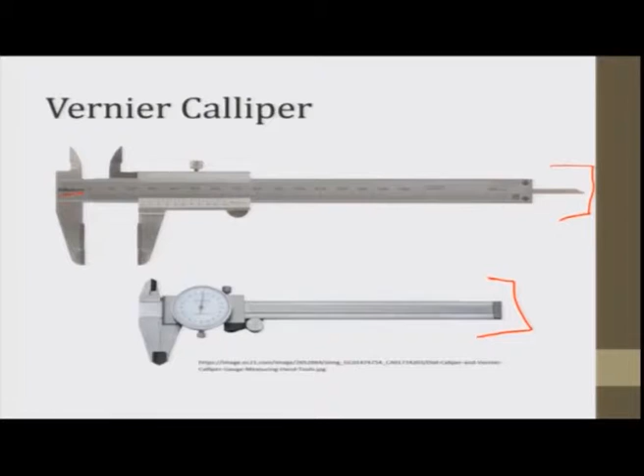The first instrument I will select here is the vernier caliper. These are the two vernier calipers that we will discuss, both manufactured by Mitutoyo, Japan, and they have certain specifications. You can see the instrument here, it has various components.

This instrument has a main scale, and its length is about 12 inches. You can see it is calibrated up to 200 mm on the main scale. On the lower side it is actually 200 mm, however the length of the scale is even larger, to accommodate the other scale, the movable part of the caliper, which we will discuss.

On the upper side of the main scale we have the inch scale, which is calibrated up to 8 inches. However, there are certain other calibration lines visible. The material of this specific vernier caliper is stainless steel, stainless hardened steel.

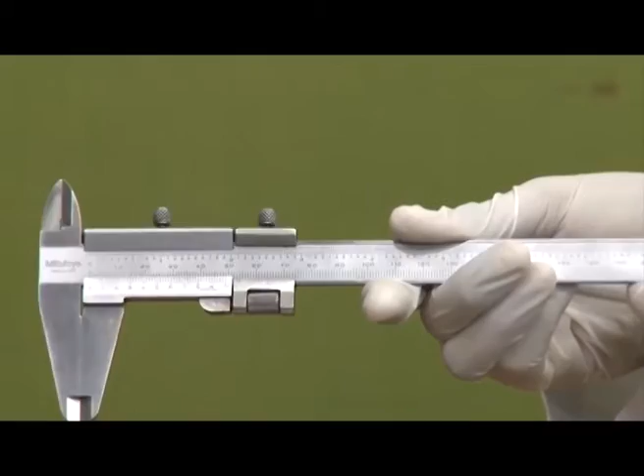It has various components as we have discussed in the theory as well. The first component is the solid L shaped frame, which is actually fixed. It has two calipers on both sides, and there is another caliper that is movable.

You can see this solid frame here, in which we have two jaws on both sides. The jaws on the lower side are for the external diameter; we can measure the external diameter of cylinders, spheres, or any body using the lower jaws. The upper jaws can be inserted into the cylinder to measure the internal diameter.

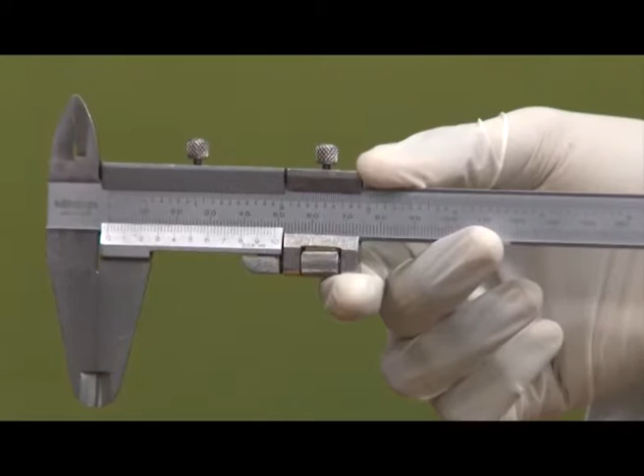If we close it completely, you can see the external jaws are also closed, and the internal jaws are also closed. When we open it a little, you can see these internal jaws, which are on the upper side, can be inserted inside, and the external jaws can hold the workpiece from the outside.

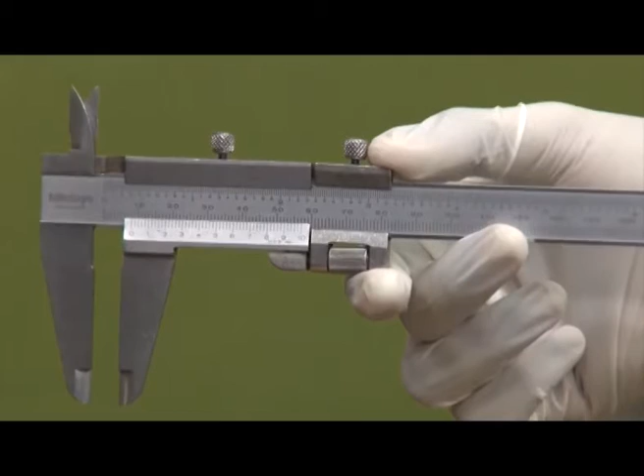We can see that whatever the slot length or gap between the lower jaws, the space is equivalent to the distance between the upper jaws. So the main scale is graduated in millimeters on the lower side and inches on the upper side.

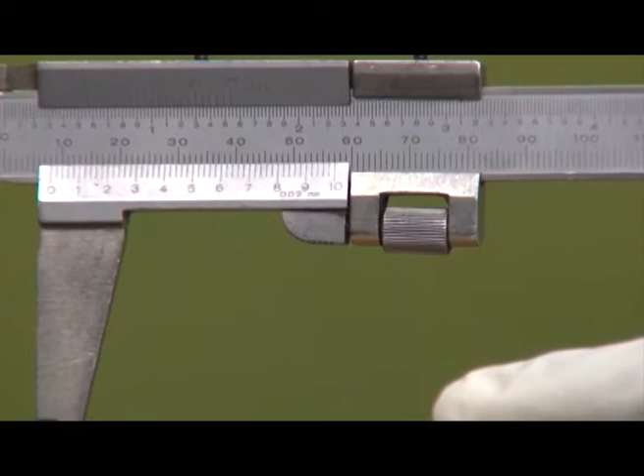There is another scale, the critical component of this vernier caliper, known as the vernier scale. You can see markings from 0 to 10 written on it. Within one number, from 0 to 1, we have 5 divisions, from 1 to 2 we have 5 divisions, and so on. This makes from 0 to 10, 10 into 5 equals 50 divisions.

Also you can see the least count is written here, 0.02 mm. It has screws attached to it. On the lower side we have the fine adjustment screw, and on the upper side we have the clamping screws.

How do we operate this one? First we tighten the screw which is on the right hand side, and then using the fine adjustment screw we can adjust the distance of the vernier scale.

The vernier caliper, as I have said, is made up of either stainless steel or tool steel, depending upon the nature and severity of the applications. It has engraved graduations which can be either forward vernier or backward vernier. This specific vernier caliper that we have in hand is the forward vernier.

You can see the reading starts from 0 to 10. Had it been from 10 to 0 on the vernier scale, it might be called a backward vernier.

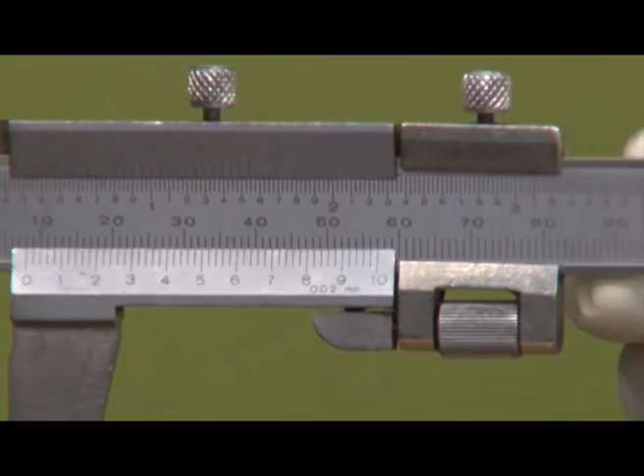The clamping screw enables the caliper's movable jaw to be locked in a particular position after the jaws have been set accurately over the job being measured. This arrests the further motion of the movable jaw, allowing the operator to note down the reading in a convenient position since the jaws would not move further.

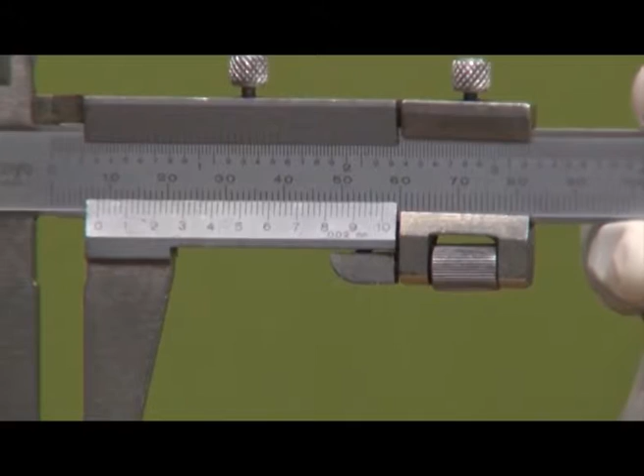Now the fine adjustment screw enables the operator to accurately enclose the portion of the job where measurement is required, by applying optimum clamping pressure.

However, there are certain guidelines before using the vernier caliper. I would like to tell them: we need to clean the equipment, clean the vernier caliper or any equipment. This is the basic precaution or guideline that we use with the instruments.

This vernier caliper is actually the analog or mechanical vernier caliper. We also have digital vernier calipers where we can adjust the zero. At any position we can say this is the zero position, since it's a digital scale. But in this vernier caliper, we need to calculate the zero error if it is there.

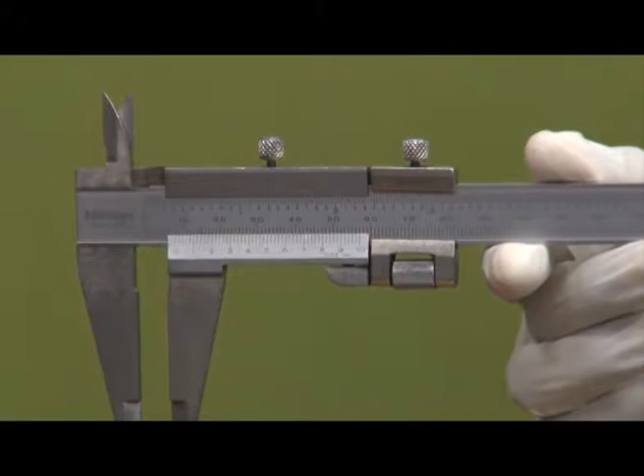Deterioration happens due to small dust particles or tiny chips which can clog or come in between the rack and pinion arrangement of the vernier caliper, which can hinder it. So, it is important to clean it properly.

The first part is I have to clean the jaws, because it is calibrated based upon this surface. This is a flat surface, and the flatness has to be approximately at zero level, though no actual zero level exists. So it has to be cleaned from here as well.

However, we can use cotton to clean it using acetone. So let us first clean the instrument and the workpiece.

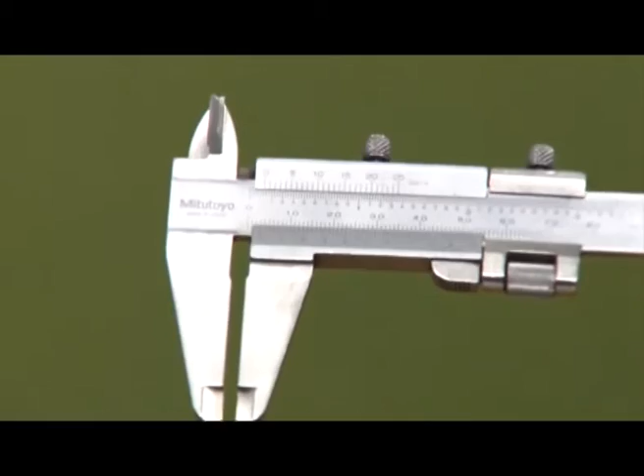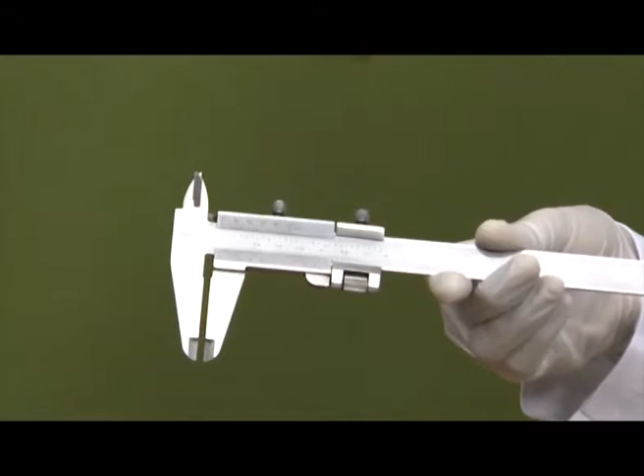Now I have this cylinder for which I like to see the internal diameter, the external diameter, and also the height, or what we can call the width. I like to see these dimensions. But before that, while we are cleaning it, I like to just tell the guidelines.

When the caliper's jaws are fully closed, it should indicate zero. If it does not, it must be recalibrated or repaired. Now, loosening the clamping screw and sliding the movable jaw, the opening between the jaws should be altered to be slightly more than the feature to be measured.

So, let us clean first.

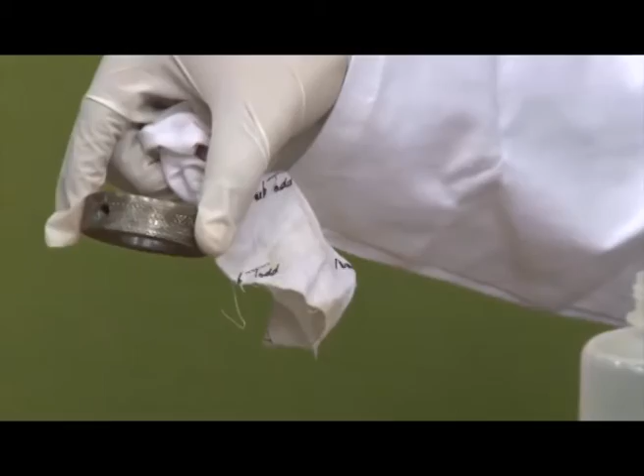So, the workpiece is to be cleaned now. We have applied a little acetone here.

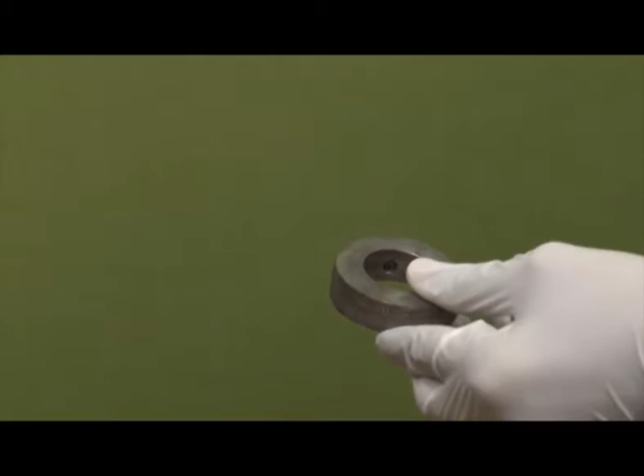So, I like to first see the external diameter. Also, not to forget, if we see the back side of the vernier caliper, you can see there is a straight probe.

This can also be known as a depth gauge. If we open it, we can also see the depth. We can see this is a probe, this is a scale. If we open it, whatever length it gets opened to, that length can also be read on the vernier scale.

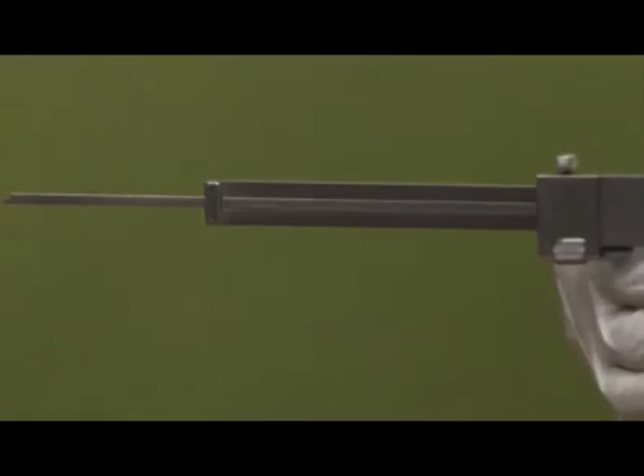So, I will first explain the vernier principle, the principle of the vernier caliper. Actually, the vernier caliper was invented in 1631 by Pierre Vernier, who was a scientist, and this is the instrument which is, I can say, most widely used in industry. There are certain measurements that we can just do using the scale.

The main, general steel rule has a least count generally of 1 mm, or sometimes 0.5 mm, where 1 mm is divided into 2 parts. But the vernier caliper can measure up to a least count of 0.02 mm.

Least count is nothing but the minimum reading that can be taken using a specific instrument. So, before checking the reading, I like to discuss the principle of the vernier caliper.

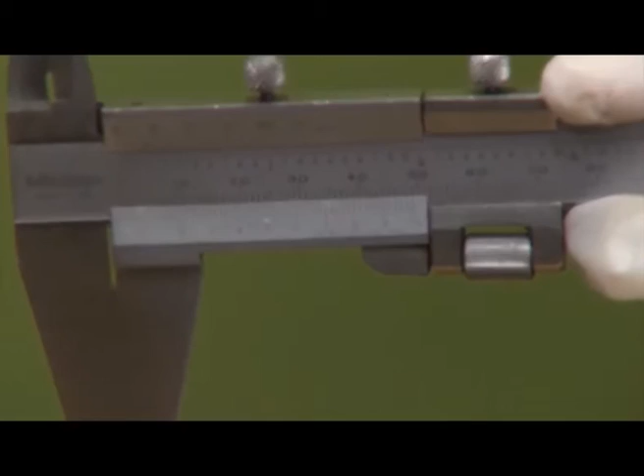So you can see that there are 50 divisions on the vernier scale. See, the numbers are from 0 to 10; between 0 to 1 there are 5 divisions, between 1 to 2 there are 5 divisions, between 2 to 3 there are 5 divisions. If I continue this, it is 5 divisions times 10, which becomes 50.

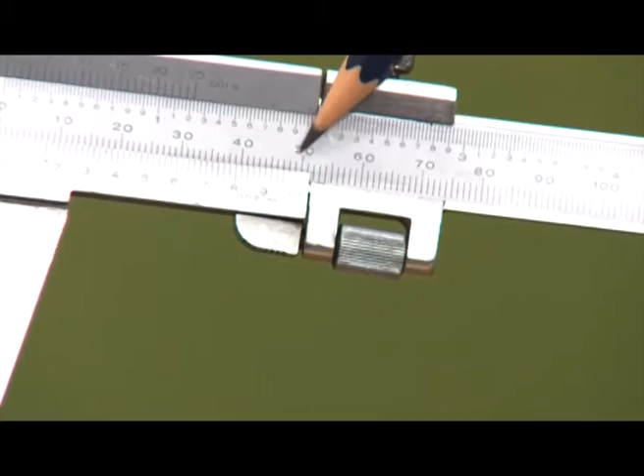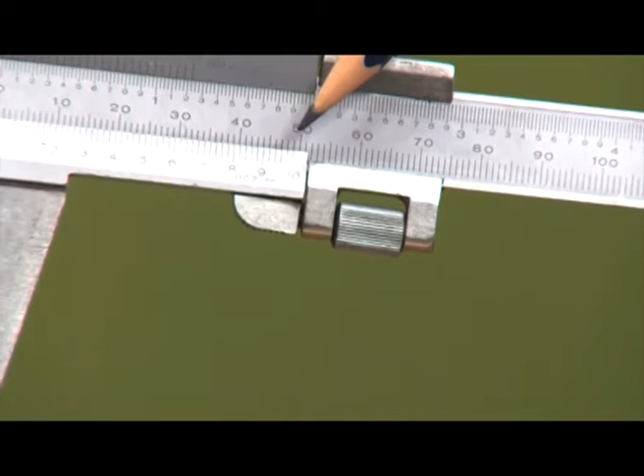So, the 50th division of the vernier scale, the lower scale, is matching with some reading on the main scale. You can see that the last reading on the vernier scale is coinciding with the 49th reading of the main scale. If you see the divisions between 40 and 50 on the main scale, it is one reading ahead of the 50, that is the 49th reading, and the last reading on the vernier scale coincides with it.

If this coincidence is there, this means that the zero is perfect, there is no zero error. So, this is actually 49 to 50.

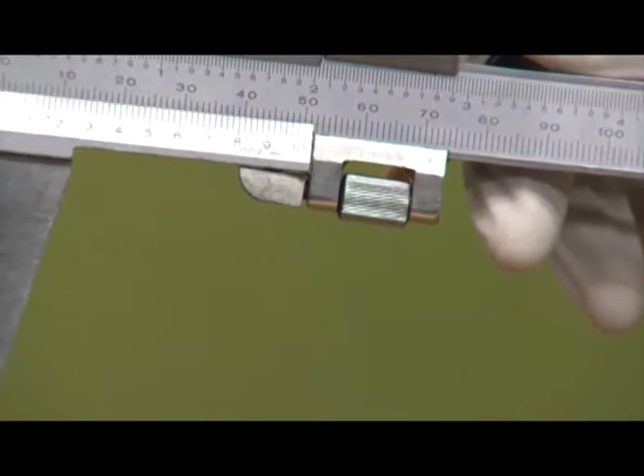I would like to explain this principle using a simpler calculation. Let me say there is a scale with 9 divisions: 0, 1, 2, 3, 4, 5, 6, 7, 8 and 9. I will call these 9 divisions the main scale. And there is another scale which has 10 divisions: 1, 2, 3, 4, 5, 6, 7, 8, 9 and 10.

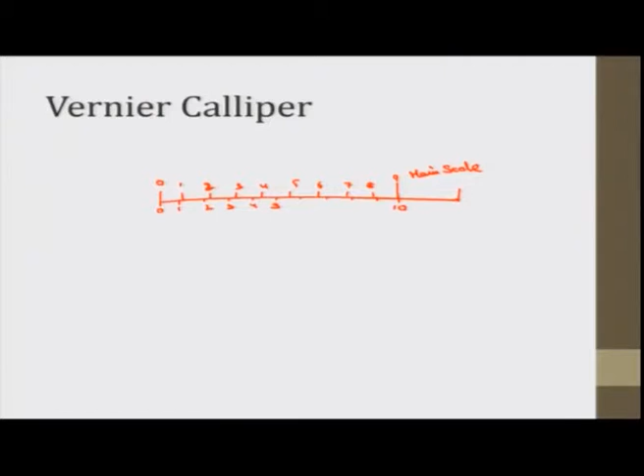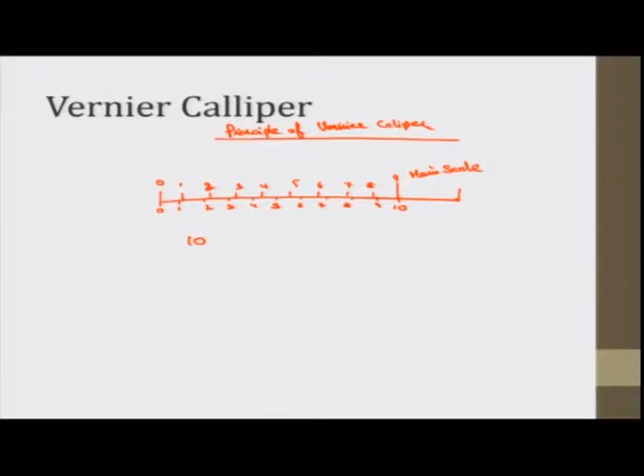I can better call this the principle of vernier caliper. So what is happening? These 10 divisions of vernier scale, I will call it Vs, is equal to 9 divisions of main scale, which implies 10 into vernier scale is equal to 9 into main scale, which implies vernier scale is equal to 9 by 10 of main scale is equal to 0.9.

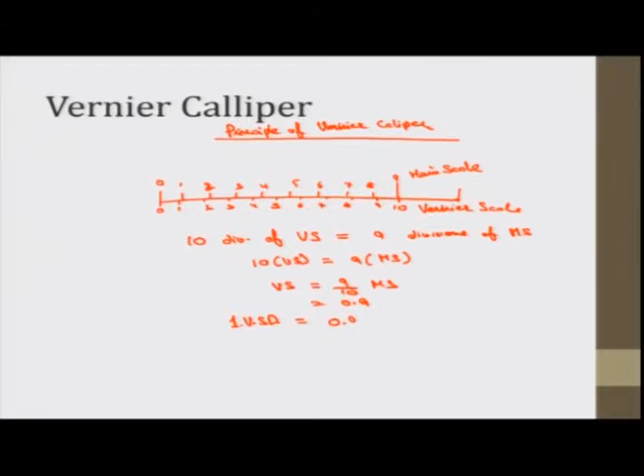That means vernier scale is equal to 0.9 times of main scale. That means one vernier scale division is equal to 0.9 main scale divisions, or this is equal to 0.9 mm.

What if this number is 49 here and this number is 50 here in the present scale? That implies vernier scale is equal to 49 by 50 of main scale. That means one vernier scale division is equal to about 0.98 main scale divisions, is equal to 0.98 mm.

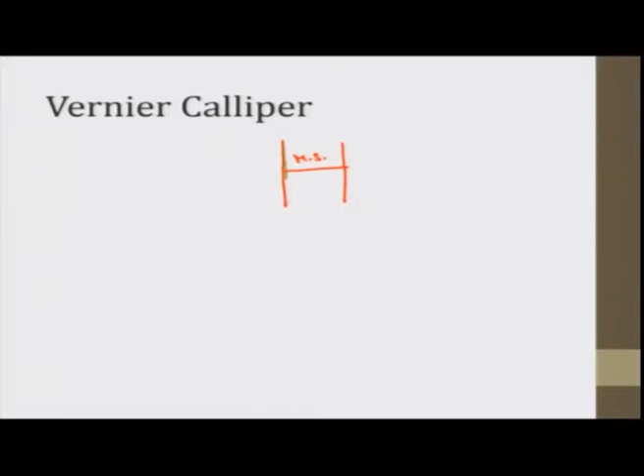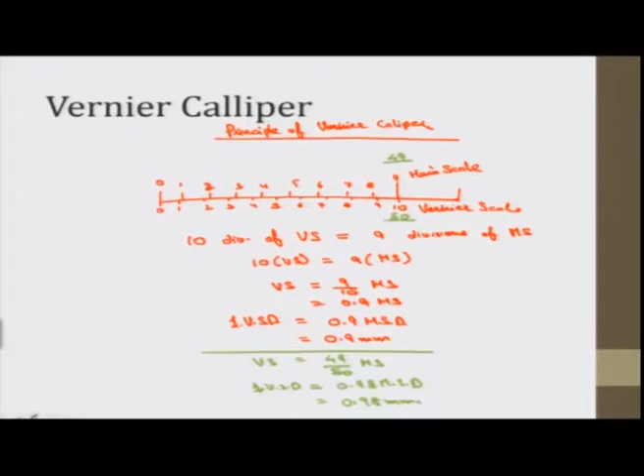Or I can better calculate it this way: 1.0 total, 1 minus 0.98 is equal to 0.02 mm. That is, the first reading is 0.02 mm.

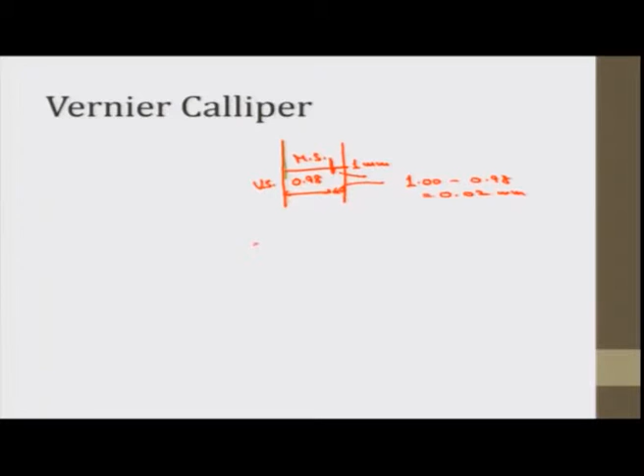Now if the first reading is 0.02 mm, what would be the second reading? It would be 0.04, 0.06, 0.08, so on up to 0.02 into 50, that is equal to 1 mm.

So these are the divisions which our vernier scale has. So when we see which point is coinciding, we need to see the point that is coinciding, that gives us how many divisions ahead of the main scale division our vernier scale is. We will just do certain measurements here and that will make it more clear. Also here we need to adjust it for the zero.

Now this gives, because this is the least count, I can say that in general n vernier scale divisions is equal to n minus 1 main scale divisions, which means 1 vernier scale division is equal to n minus 1 by n main scale division. This gives us the least count. That means least count is equal to 1 main scale division minus 1 vernier scale division. This is known as least count, which is equal to 1 main scale division minus n minus 1 by n main scale divisions, which is equal to actually 1 by n of the main scale divisions. So this is our least count, the formula for the least count in general.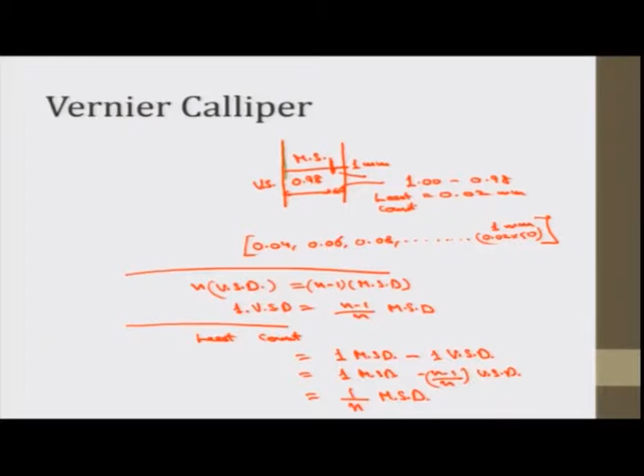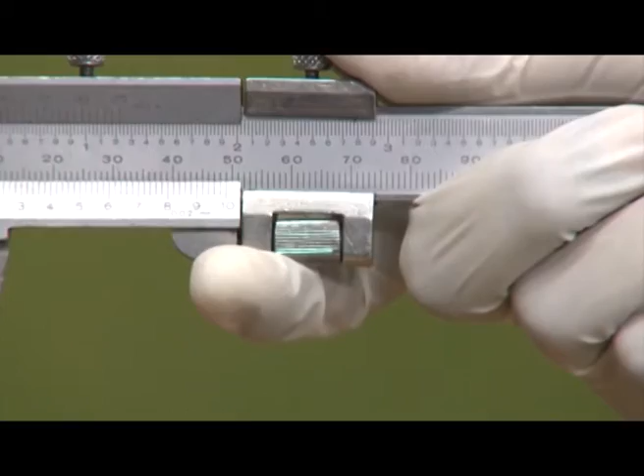So let us try to see the dia of the cylinder that we have. Let us first try to see the external dia. Now we will see the external dia of this cylinder. One thing is that we can just use the main scale, the steel rule, to measure the dia, but the accuracy or the least count there would be 1 mm. Let us see up to the second place of decimal and only the even numbers, that is 0.02 least count, what is the dia, external dia of this.

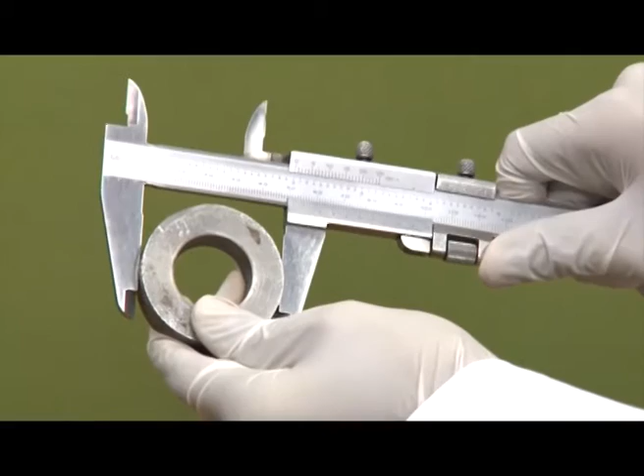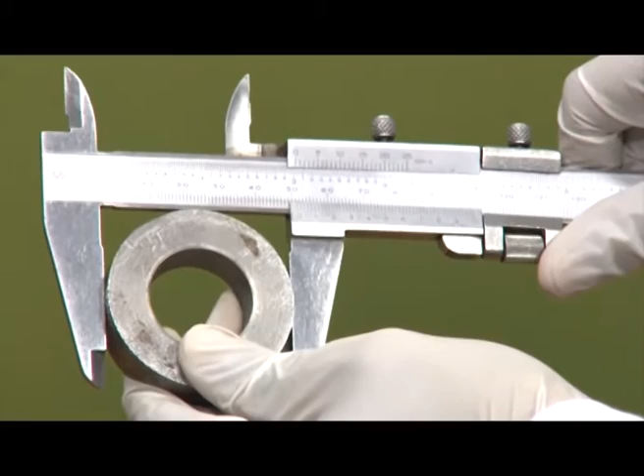See, we are using the finger lock to see. First we will lock the clamp in which we have the adjustment screw, then we will use the fine adjustment screw to put the pressure.

So the way to do it is, when we loosen the clamping screw and slide the movable jaw, altering the opening between the jaws slightly more than the feature to be measured. Here the feature that is to be measured is the cylinder. We open it a little more than that, then hold the feature in the jaws, then place the fixed jaw in contact with the reference point. This is the way we open it a little more than the feature to be measured, then place the feature, that is cylinder, to the fixed jaw. It is placed to the fixed jaw.

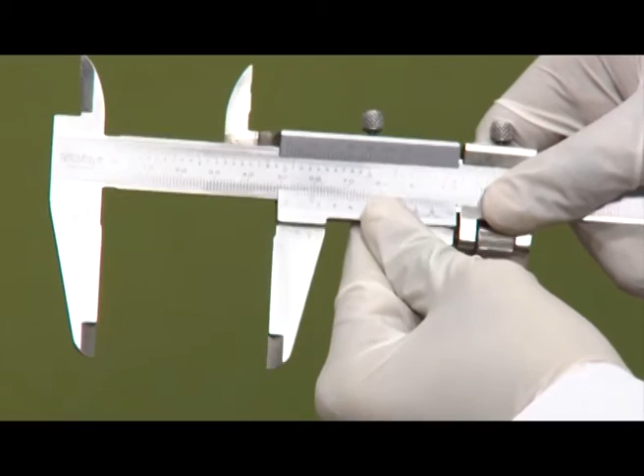Now the movable jaw is taken close. Now we clamp the screw. Now, using fine adjustment screw, we can apply a little pressure. Now we tighten the clamp screw on the movable jaw without disturbing the light contact between caliper and the jaw. Then we will tighten the screw. Then we will remove the feature. Now, because both the clamping screws are locked, we can very conveniently see the readings.

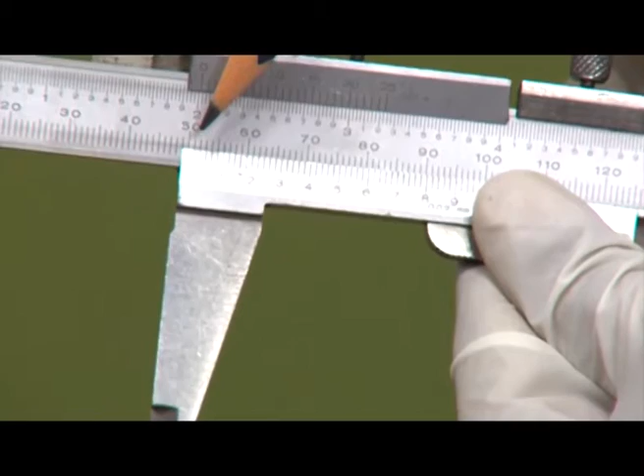Now, to see the readings, let us see what is the zero. Zero of the vernier scale is matching with 51. Actually it is not matching exactly, it is a little forward than the 51st division, that is, it is about 51, and we will see which reading is coinciding. So let us see which reading is coinciding. Actually this is a close look, we have to be careful.

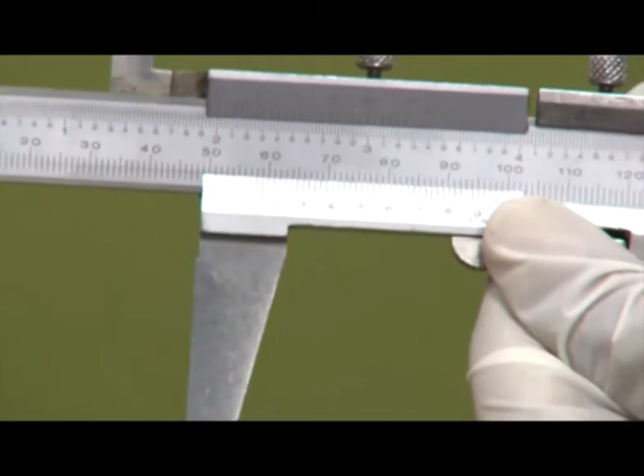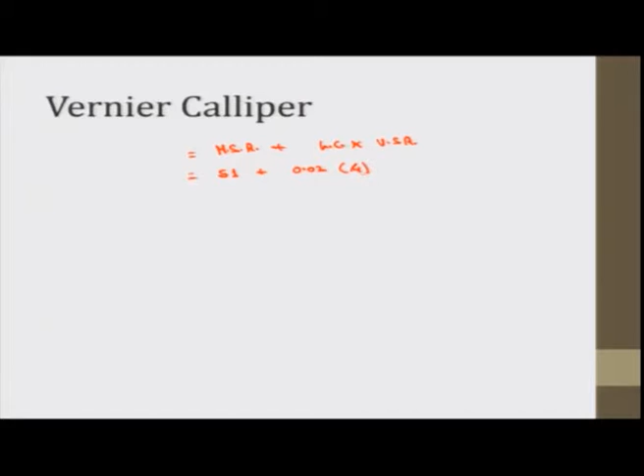The best coincidence here is the reading number 4. Between 0 to 1, the 4th reading is coinciding, which means the dia of this workpiece is equal to main scale reading plus least count into the coinciding vernier scale reading. So which is equal to main scale reading is 51 plus least count is 0.02 into 4th reading, which is equal to 51.08 mm. This is the external dia.

So actually when we do the calculations, when we do the measurements, it is not done only once, as we will discuss in statistical aspects of metrology. No reading is taken only once. Generally we do not trust a single measurement, we do multiple measurements. So we will check the dia at some other location as well.

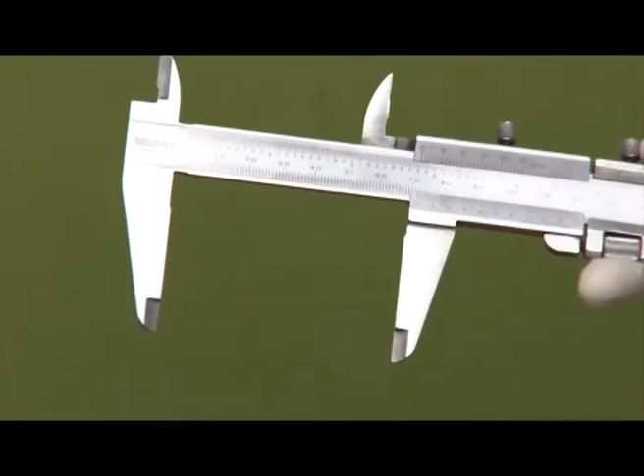Again the same procedure: opening, moving it to the fixed jaw, then closing, locking the clamp, then fine adjustment screw, a little pressure so that we can remove it properly.

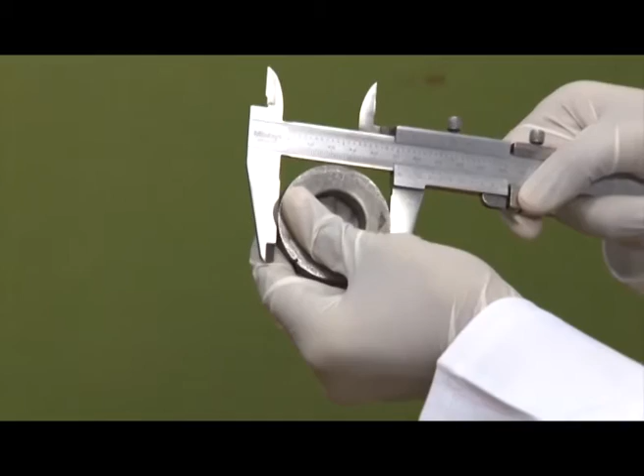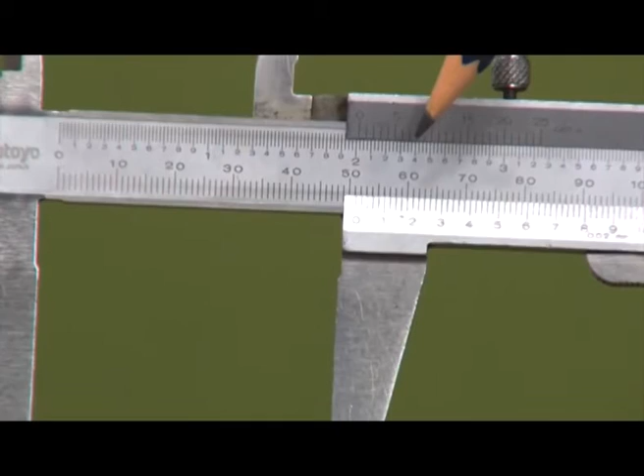Now let us see the readings again. It is about 51, the main scale reading is again 51, this is observation 1. Then observation 2, the main scale reading here is 51 plus least count into vernier scale reading. Let us see which vernier scale reading is coinciding. If we see it closely, the reading that is coinciding here, yeah, the 9th reading is coinciding.

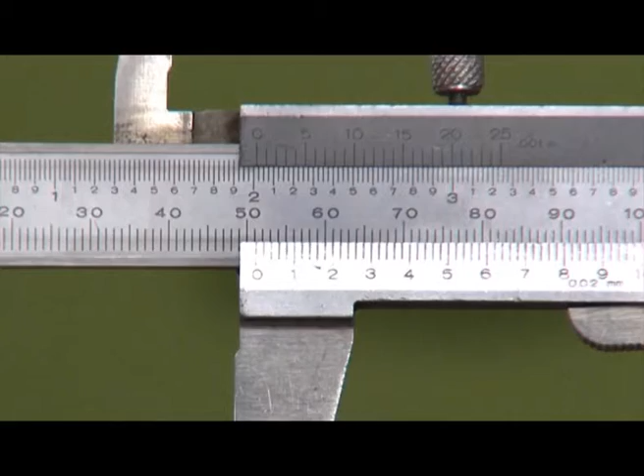So it is 9th reading, which is equal to 51 plus 0.18, equal to 51.18. So you can see that the two observations have a difference of 0.1 mm. So when we see it using a general scale, the reading we can see would be just 51 only.

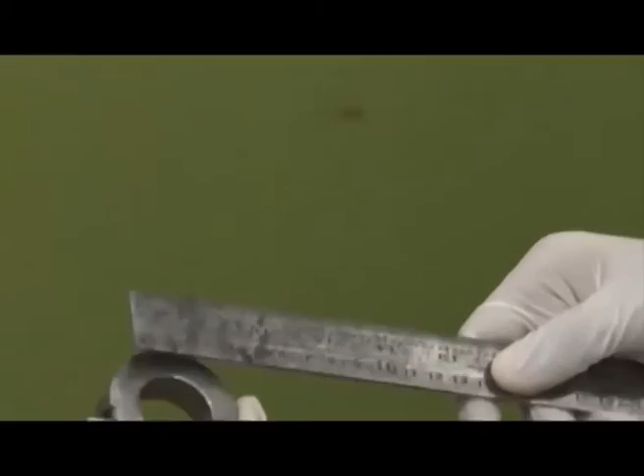The dia, actually it has to touch a reference plane here. Touch it. The dia is about 51.

So the thing is this difference, 0.08, 0.18. We can do multiple observations using this and take an average. If I take only these two readings as my final observations, the final dia of this workpiece would be 51.08 plus 51.18 by 2, average is equal to 51.13.

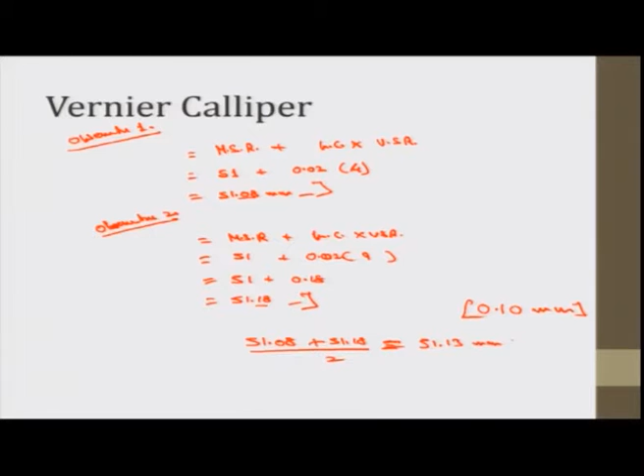So why is this dia different? This workpiece, can we see why this difference, this error is there? If we see this workpiece closely, you can see that on the external portion we have these serrations, this is actually knurling that is done here. Because of this knurling there are ups and downs, crests and troughs, peaks and valleys, so at different locations the dia is coming a little different.

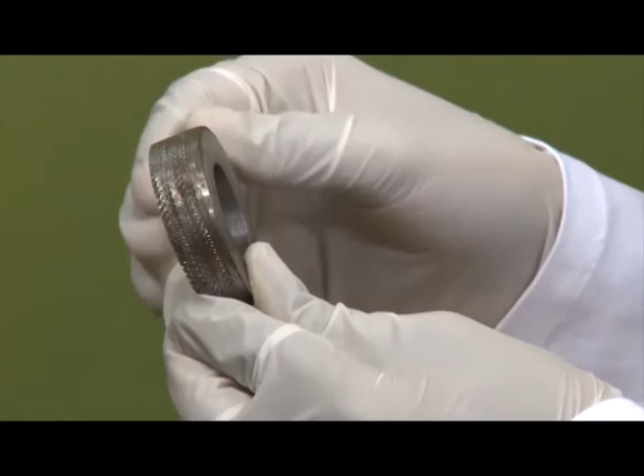So this is quite sensitive to our vernier caliper. Our vernier caliper, having a least count or sensitivity equal to 0.02 mm, is able to identify this difference. So this difference is high, this event is out of the order of, based on these two divisions, this difference is of the order of 0.1 mm that I have just written here.

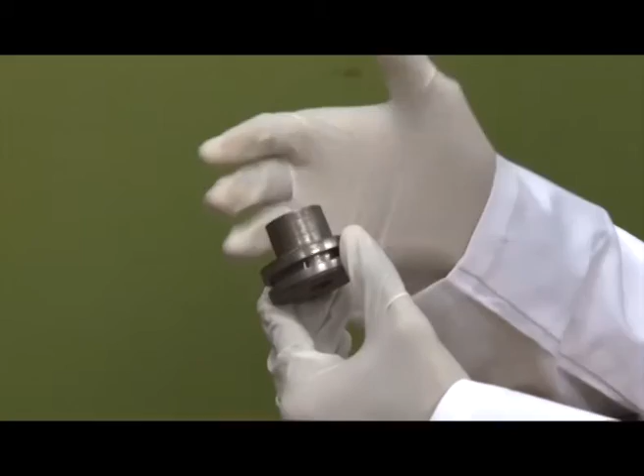So also we can see the internal dia. I will pick another workpiece here, for which I will use all the jaws, the depth gauge, the internal, external, to draw the full drawing and identify all the measurements or dimensions of this workpiece. So I can see this workpiece has various portions: it has a small cylinder, a big cylinder, and we have a slot in between.

Then we have a small hole on the upper side, actually a through hole, and also we have a thread hole, a keyhole, that is also a thread. There are internal threads here. Let us see all these dimensions. Could I draw the drawing of this? Could I draw the specifications, or get the specification and make the drawing of this component? Let us see, so it is this kind of component.

I will make the drawing while we see the dimensions. Let us see the external dia of the bigger circle. Using the same procedure, the reading that is coinciding, I will just note the reading and not show the calculations exactly. We will save time in this way.

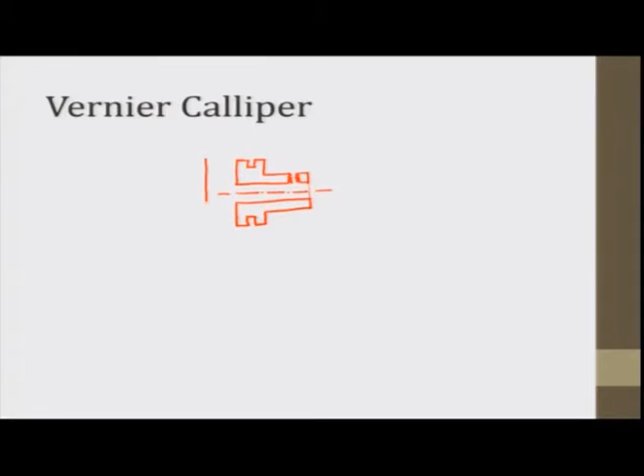So the external dia here, on the vernier caliper the approximate reading here, it is this dia, let me call it capital D. Let me choose a different color for dimensioning. It is 49. I will just use main scale division plus 0.02 into vernier scale division. It is 49 plus 0.02 into 11, you can see the 11th reading is coinciding here.

So this is 49 plus 0.22, equal to 49.22. I will just put this value here.

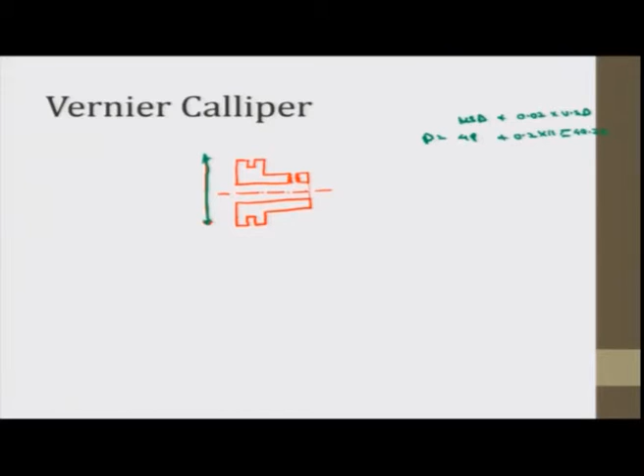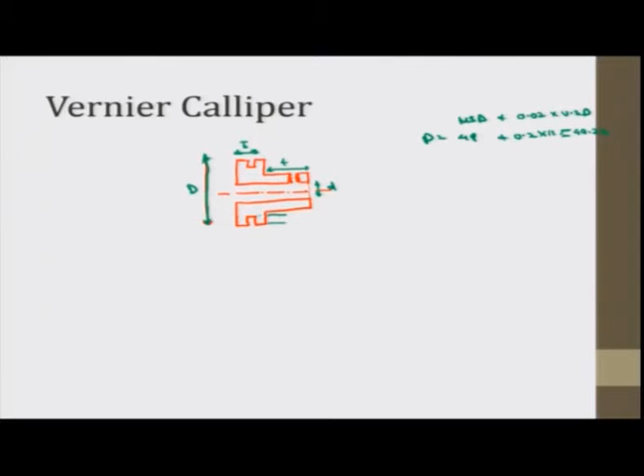Okay, next is the internal dia. This is small d, this is capital D, let me call this capital T, let me call this small t, let me call this depth. We can see the internal dia as well by inserting the internal jaws inside the cylinder. We are locking the screws using the same principle. After locking the screws, we can see the reading. So the internal dia, the main scale reading is 11 and the coinciding point is the 44th.

So we will put all these calculations and provide you with the notes. This was actually the purpose of this demonstration, to show you the principle and use of the vernier caliper. This vernier scale is not only used in calipers, it can also be used in height gauge, which is another instrument we will demonstrate further.

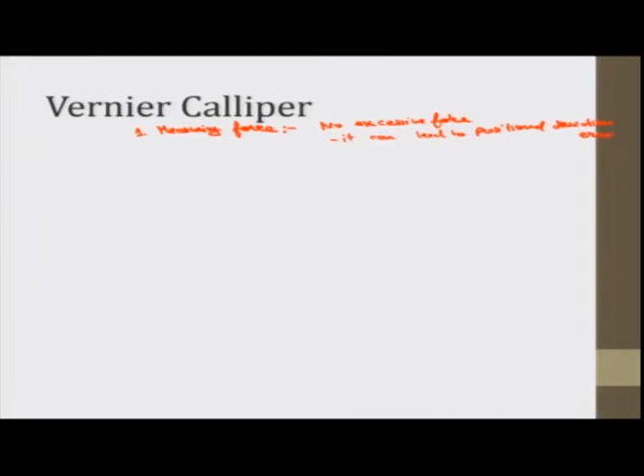Number 2 is the observer error, that is parallax error. However, the instrument is quite clear, we can see which vernier scale reading is coinciding with the main scale. In general, parallax error could also come, though not in the vernier caliper specifically, since in general parallax error is avoided. This instrument is not that sensitive that parallax error would be significant here, but it is an important error. If it comes, it can give us a difference of at least one reading.

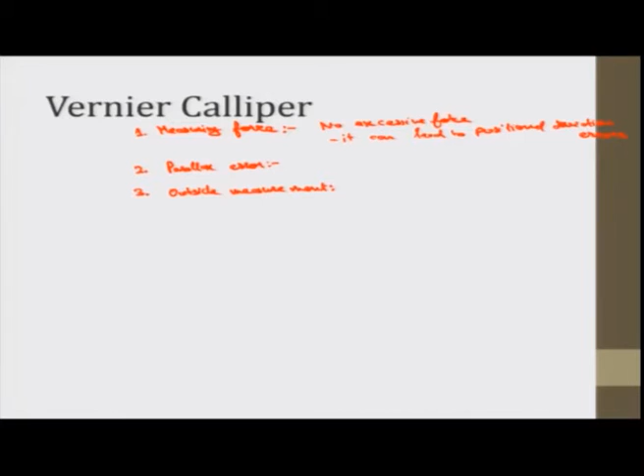Number 3 is the outside measurement. For outside measurement, we can put the workpiece as close to the reference surface as possible and have the measuring faces fitted with the workpiece, because if outside measurement is not done properly, it can give us some error.

Inside measurement also has similar kind of drawbacks. So in inside measurement or outside measurement, it is important to note the maximum reading and the smallest reading. Take both readings at least, if possible.

I did not use the depth measurement yet, I can also use the depth gauge. In depth measurement, you can see the depth of this workpiece using the depth gauge. For using the depth gauge, we need a flat surface.

We are not using the surface plate here, so I have picked this spirit level. The spirit level is also smoothened, it is grounded properly. The ground is 1/10,000th of an inch. This much sensitivity, this much smooth surface is there.

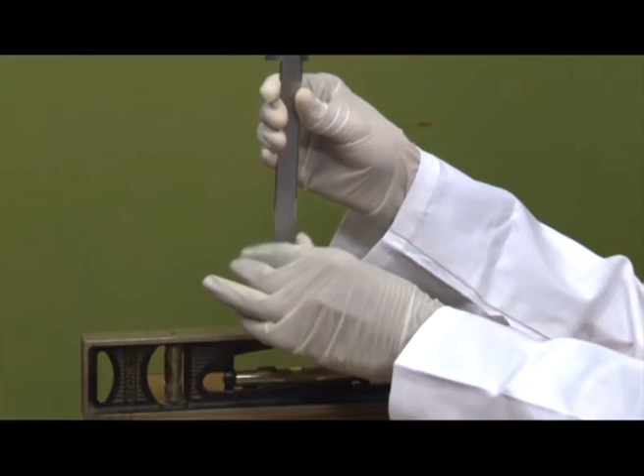So we have inserted the depth gauge in this, made it to touch the base. Now we can note the reading. While using the depth instrument or depth measurement, there are certain precautions, like setting the depth bar perpendicular to the measured surfaces.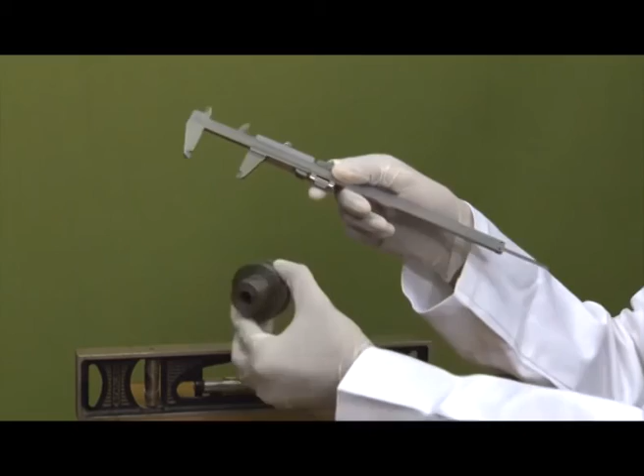Also, we can do some step measurement. In step measurement, we have the step measuring face fitted with the measured surfaces. The step measurement can be like we have a groove in the workpiece; this can also be called a step. So we have a groove here, we step down, then we come up. Actually this side is the same and this is a step.

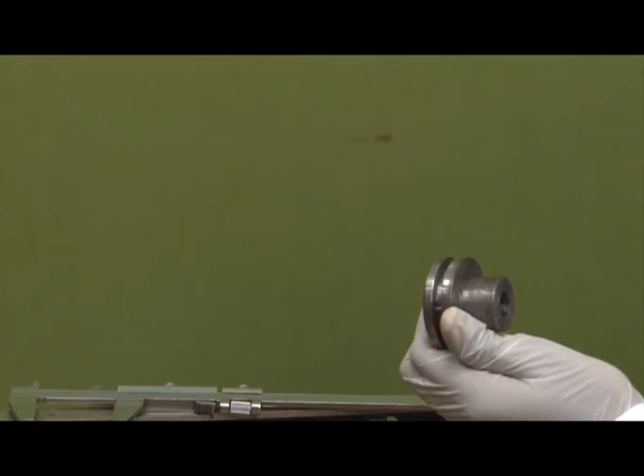So in step measurement it has to be closed. Then positional error could also come, you have to be careful about that.

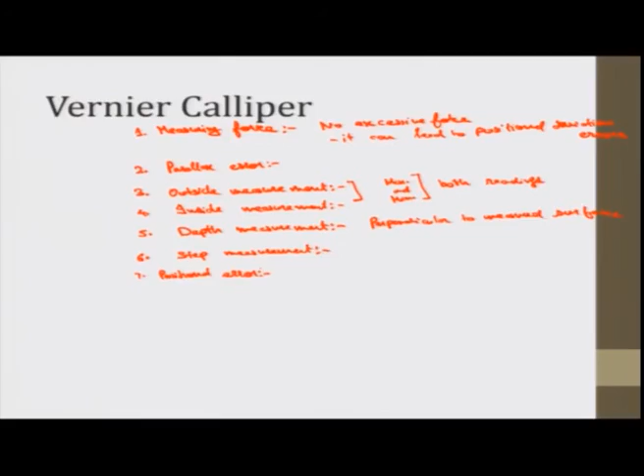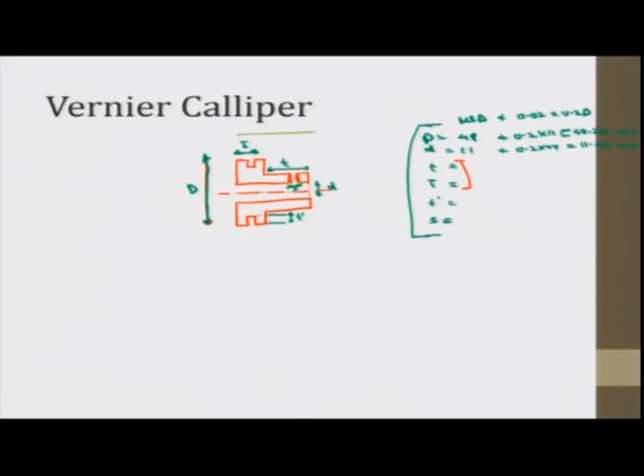So for the depth measurement, the main scale reading is 41 and the vernier scale reading, it is actually this total here, is 41 plus 0.02 into 7, where the 7th division is coinciding, equal to 41.14 mm.

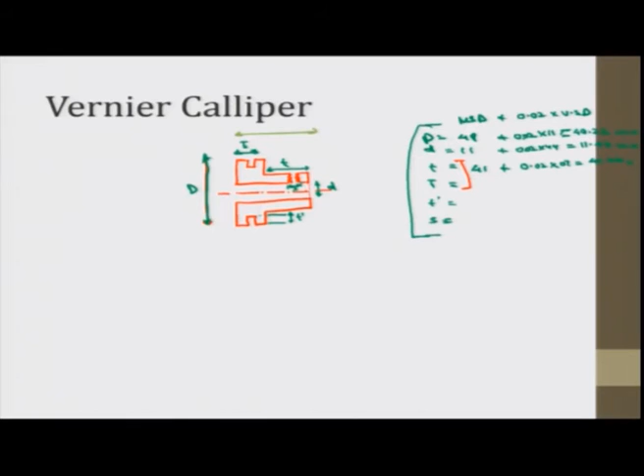So this is our vernier caliper. We also have another vernier caliper. In this vernier caliper also we didn't have any zero error. Had it been the zero error, we would have to add or subtract that. Sometimes the zero is not coinciding, sometimes the reading is forward or backward, so we have to adjust it accordingly.

Whenever it is forward, it would mean the reading is a little larger. When the jaws which are closed are open a little, this is known as positive error. So whatever reading we get, for instance if I get reading 50.20 and this error is 0.10, this 0.10 is something that is added to it, so we need to subtract that. This positive error has to be subtracted, and if it is an overlap, that would be a negative error, which has to be added. So we have to adjust for the errors.

To deal with the error so that zero error does not occur, the instrument error, we have the dial gauge, we have the dial vernier. The dial vernier is the one I will discuss after first discussing the dial gauge. Also, there are digital vernier calipers in which we can set zero at any point, so that can also deal with zero error. So this was the vernier caliper.